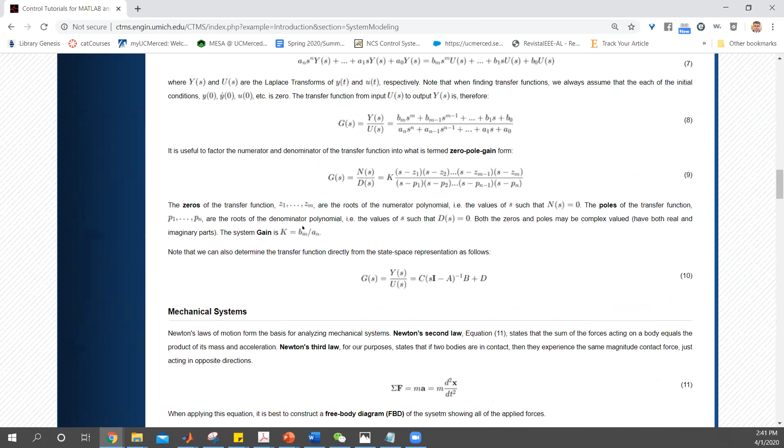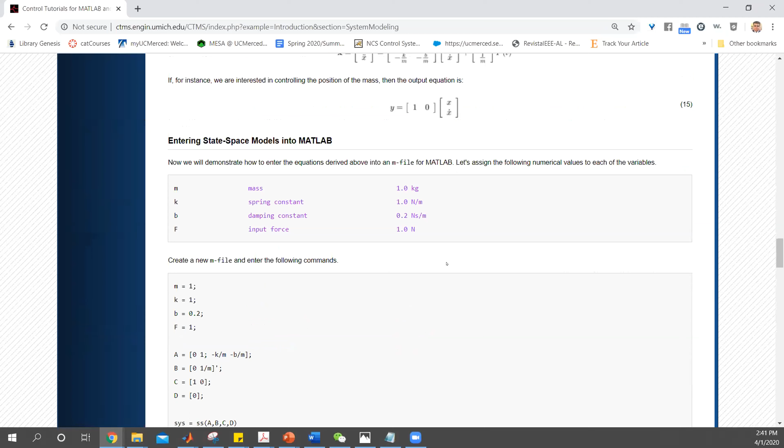This is the CTMS website, Control Tutorials for MATLAB and Simulink. We have introduction concepts like dynamic systems, dynamic response, and modeling. For example, here is the modeling of a system, and code required to implement systems in MATLAB, such as implementing the transfer function, making modifications, an RLC circuit, and many other important concepts.

We have different tabs: modeling, analysis, control. For control, we have different techniques: PID control, root locus controller design, frequency domain design, state space, and digital implementation. We also have another tab for modeling and control using Simulink instead of MATLAB code. Both are important and useful for performing the MAD methodology and designing any control system.

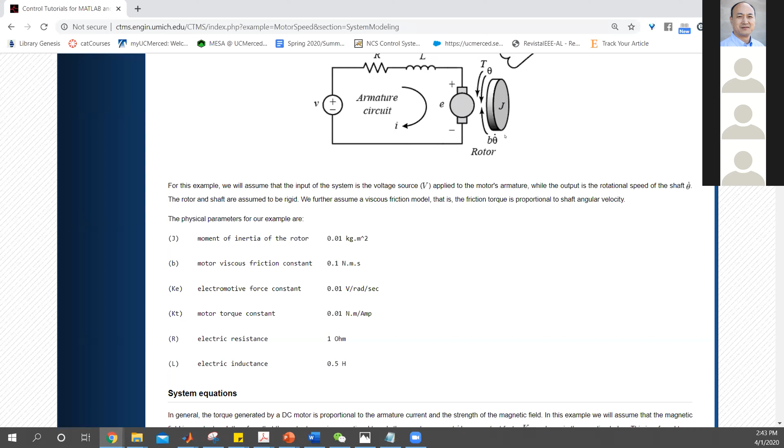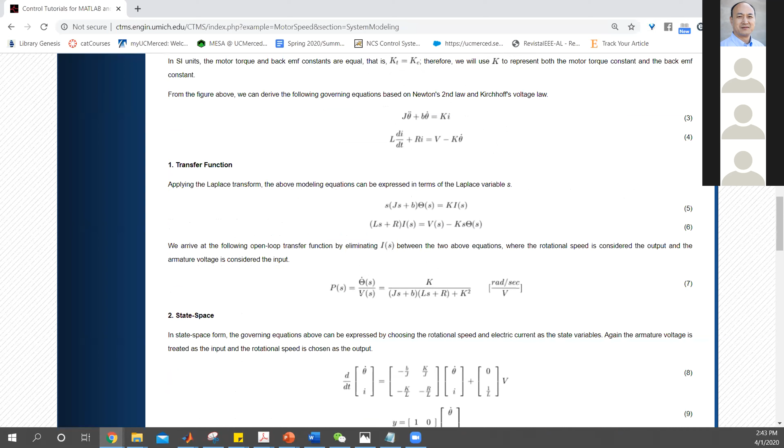The constitutive equations are used to derive the differential ODE that explains the dynamics of the system, and how to derive the transfer function for this system, in terms of speed and input voltage. It also shows how to derive the state space model, and how to build the models using MATLAB Simulink.

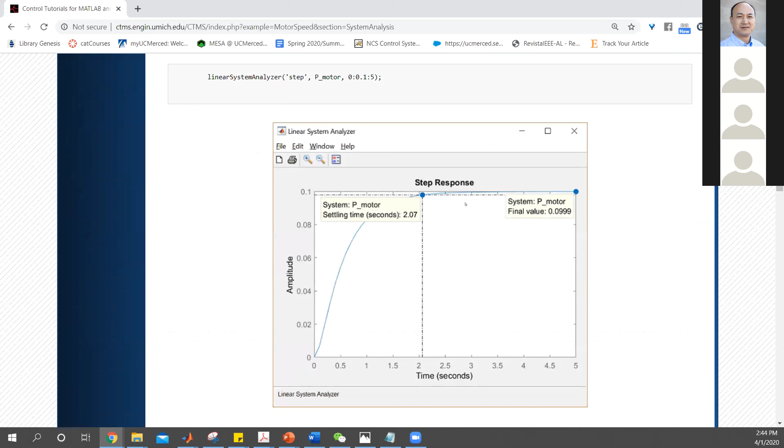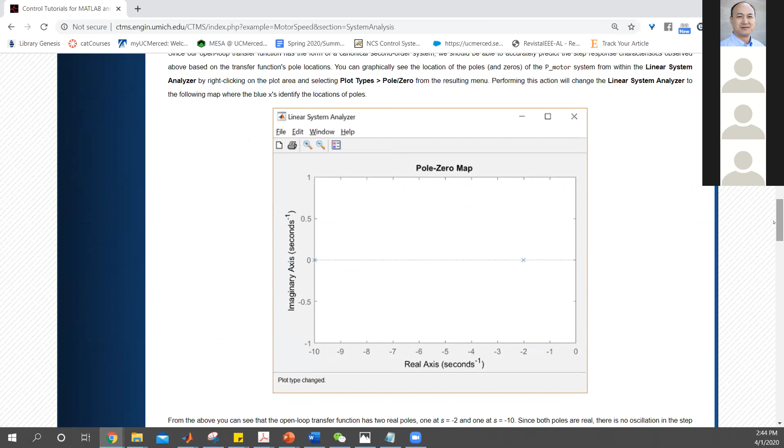Also, you can go through analysis. In analysis, you can examine the open loop response, for example a step response using MATLAB. You can also do root locus or a pole-zero map for this transfer function, and compare different responses.

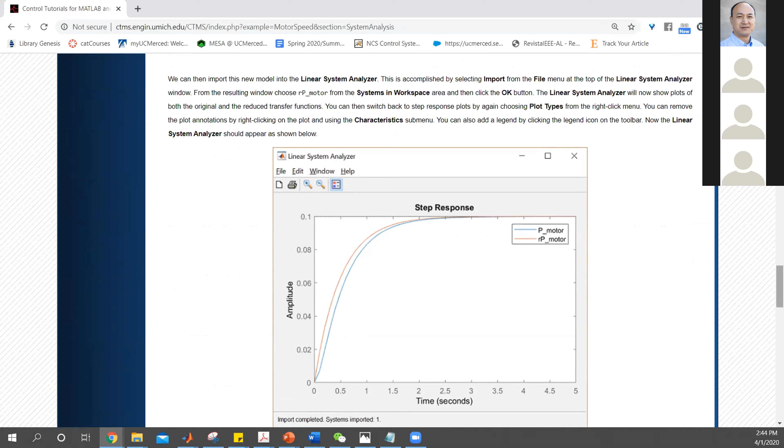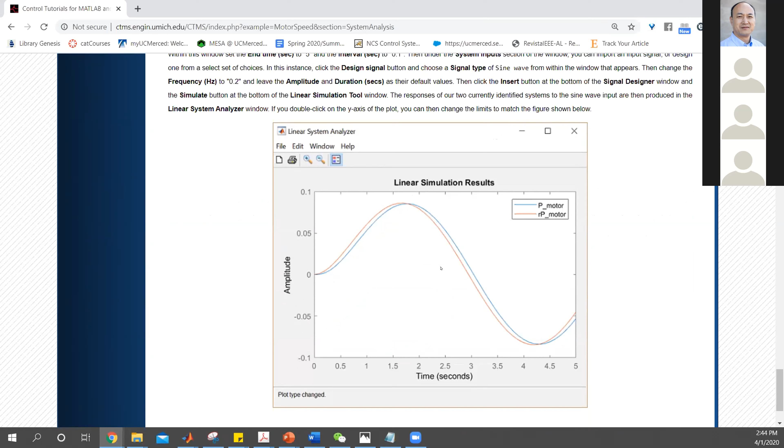We can see different responses if we change some parameters in the system. We can also test different inputs, not only step response, but sine waves or impulse response, depending on what the problem asks you to do.

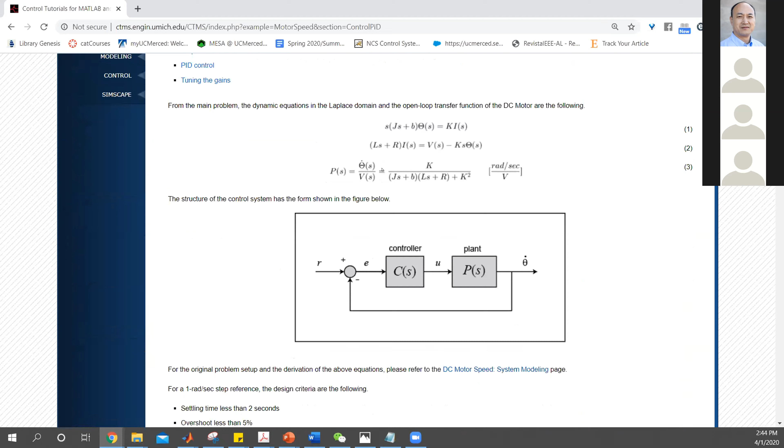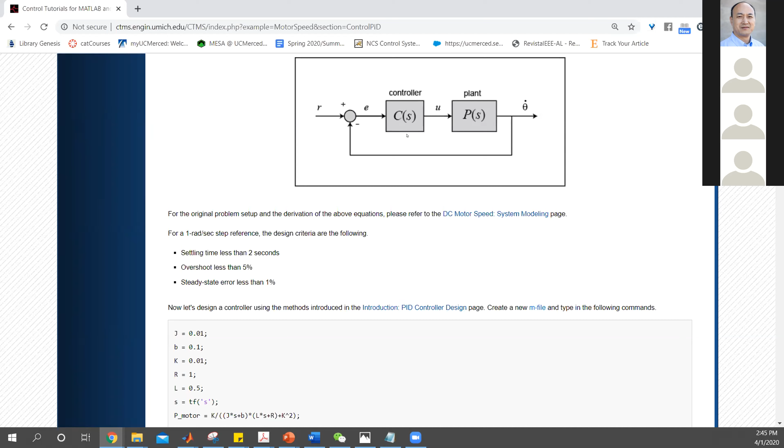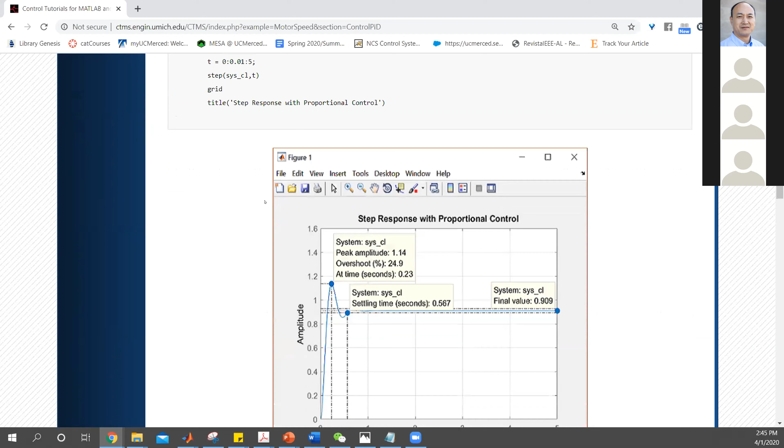Also here we have the control part, specifically the PID tab. This tab is based on the previous modeling made in the modeling and analysis tabs, showing how to make the closed loop to regulate the speed of the motor. We have the plant found before, the controller, the transfer function of the PID controller, how to implement the transfer function of the model, and how to derive the simple proportional controller, calculating its step response and performing analysis.

This shows how to design a compensator, specifically the proportional gain in this case, using all the tools that MATLAB has.

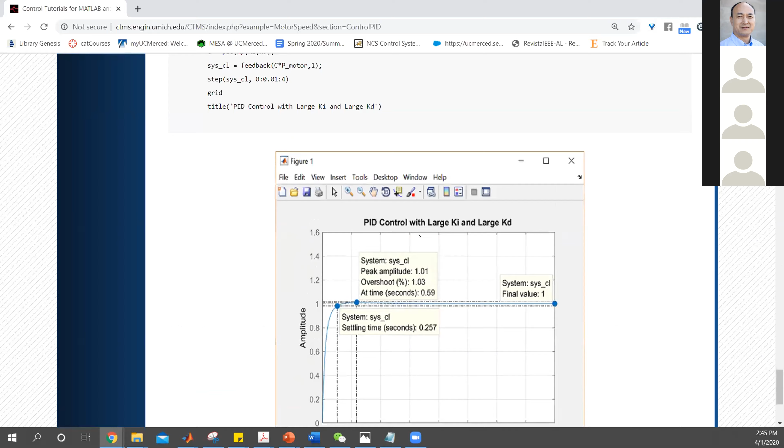Here we have the PID control tutorial, showing how to tune the gains and how the changes affect the performance of the system. You will go through all this during your lab assignments in order to understand all the steps of MAC: modeling, analysis, and control.

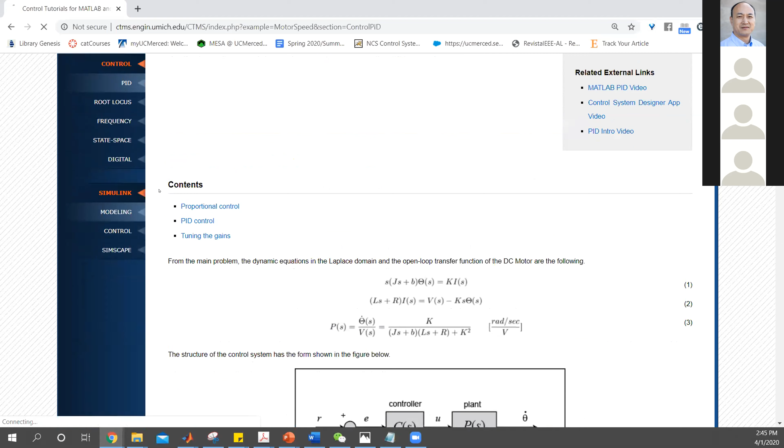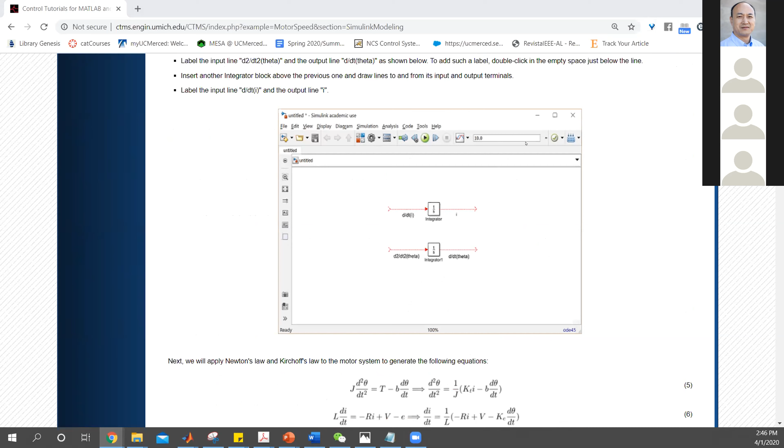Finally, you can go through all the other tabs as part of the required assignments for each lab. For Simulink, we are going to do the modeling again, but this time building it totally in Simulink, showing step by step how to build the electrical motor model.

Dr. Chen, we have a question. Do we have a quiz for today? We don't.

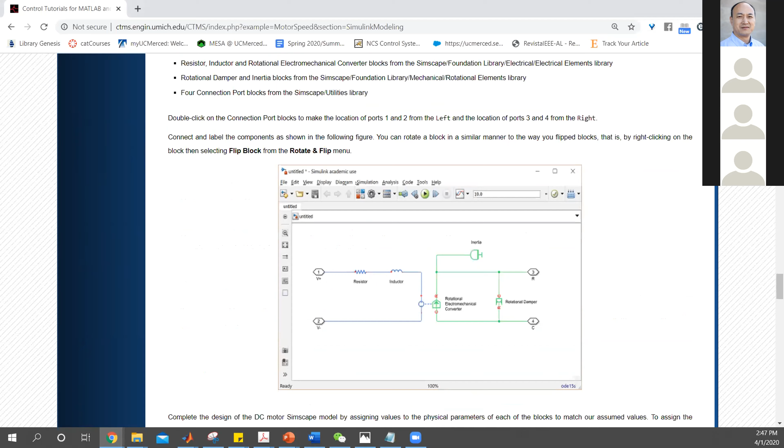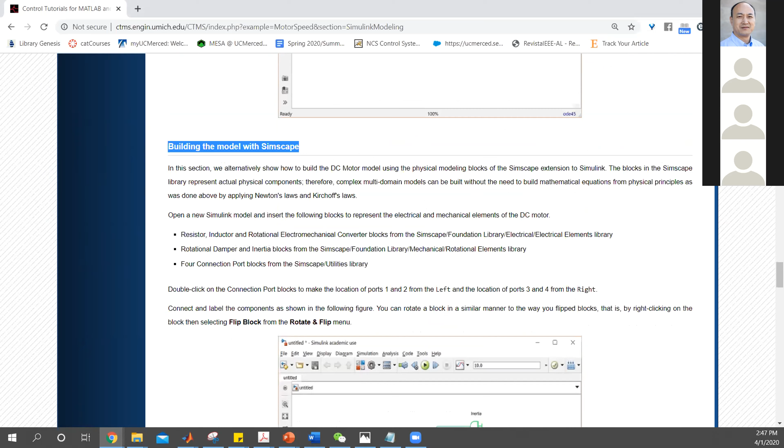Also, you can build using Simscape, a multi-domain physics tool within Simulink, but we are not going through Simscape in the lab assignments. We are only going into Simulink to build the model using Simulink elements, not Simscape. So if you see this Simscape tab, you are not going through there in the lab assignments.

All right, you'll find basically the same setup for any of the examples you have here. In this case, for the CTMS website, let's go back to the slides.

We will have three labs in this case: Lab 6, Lab 7, and Lab 8. Lab 6 is an introductory lab, a comprehensive learning of MATLAB Simulink, using the DC motor speed tutorial that I showed before on the website.

Basically, the due date for all the lab assignments will be Saturdays. Lab 6 is due April 11, Saturday. Lab 7 is April 18, Saturday. And the aircraft pitch control, the final lab, will be April 25, also Saturday. The idea is that you have plenty of time to work on each assignment. Right now, all the labs are available in catCourses, so you can work on the labs at your own pace.

Okay, so for Lab 7, we're going to switch the system to the DC motor position servo tutorial. In this case, Lab 7 goes a little bit further than the previous one. Lab 6 is more comprehensive, teaching how to use MATLAB and Simulink to build these models in the best way possible and make the models properly represent the dynamics of the system.

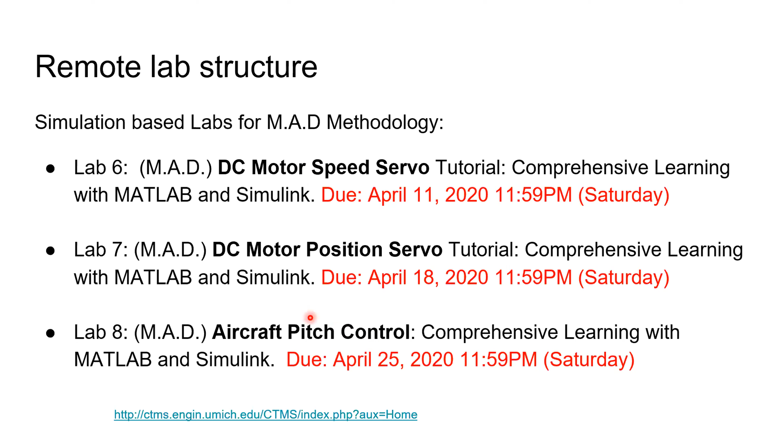Okay, we have here some lab overview for the system. These are the student learning outcomes we expect you to reach after finishing these labs: basically, understand the modeling and analysis steps of the MAD methodology applied in this case to the DC motor system.

It means deriving the equation of motion, transfer function, or state space model for the system. Learn how to obtain step response, pole-zero map, root locus, and bode plots for the system, which is really important for analyzing the dynamic behavior of the system.

Analyze the closed loop behavior using the different controllers you could find in the tutorial: P, PI, PID, and lag compensator. You will go through this.

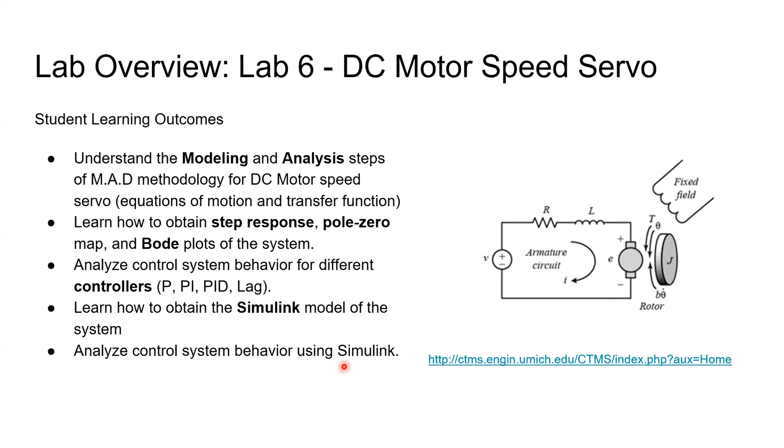Learn how to obtain and create your Simulink models for these systems. If you learn how to build this system, you can later build whatever system you want. Finally, analyze control system behavior, in this case using Simulink, not only the tools we have in MATLAB, but also the tools we have in Simulink.

All right, so for Lab 6 it's modeling and analysis; Lab 7 we are going to design. In this case, understand the design step of MAD. We are going to change the system a little bit—it's not speed control, we are going to position control, which is an extension of the previous system we used.

DC speed control overview: equation of motion, model reduction in this case for large poles. You will see how, if we have a very big transfer function, we can reduce it to maybe a first or second order system that has an equivalent representation of the system behavior.

Another important thing: understand the effects of P, PI, and PID control gains on your closed loop behavior. If you change the proportional gain, the integral gain, or the derivative gain, you will see different effects on your closed loop response. This is really important when you want to design a controller.

Another important thing is introducing the pole placement methodology for picking the control gains. In your Mechatronics lectures, you go through other methodologies; in this case, we are going to use pole placement, which is a model-based methodology. It means you have a model for your system—first or second order—and based on that model and some desired specifications, you can reach the proper gains for your controller to achieve that desired state.

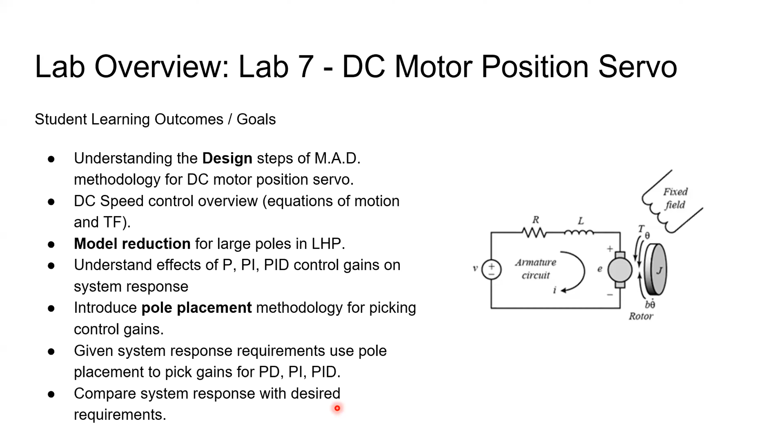For lab 8, aircraft pitch control, the student learning outcomes are to apply the MAD methodology for a more complex mechatronic system, in this case an airplane pitch, and to be familiar with state space and transfer function representations. Transfer function is one of the representations, state space is really useful also, so being used to employ both representations is important for you as future controller designers.

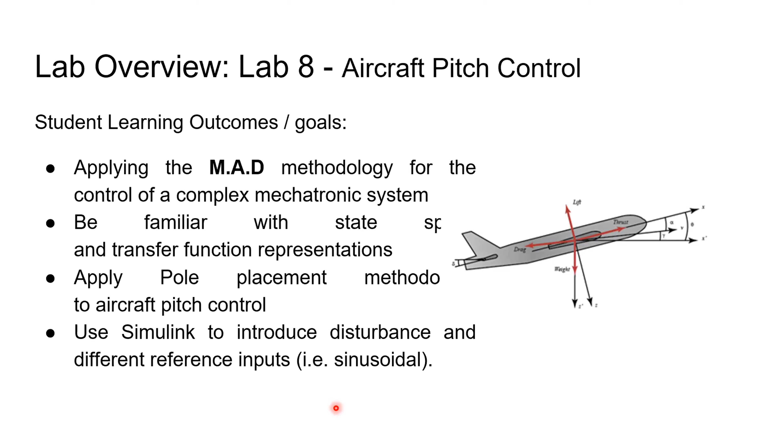Use Simulink to introduce disturbance and different reference input. What happens if your system is not perfect? If something goes wrong, how do I introduce this undesired behavior and how do I see how my system responds? This is the main idea of this lab: use the state space and introduce the disturbances that affect the system behavior.

Okay, I think now Derek is going to explain the lab report formatting.

And sure, yeah, so I can take over this part. I think you covered most of my other points on the other slides, but that's okay, Jairo.

So for the lab report, we thought we would add some structure. For the most part, we would like to see at least an introduction explaining the reason why we're looking at whatever lab we're looking at, then the main body with different parts such as the modeling part, the control part, or Simulink, and then you want a conclusion. One thing we didn't put on the slides: before the conclusion, or as part of it, you should put a summary of things learned, things that you guys took away from the lab.

And so we'll have a lab example report we can show you in a second. I did this in 2 columns. Can you go back to the slides really quick, Jairo? Yes, so the 2-column format is not mandatory, but I figured because the final project is going to be in IEEE format, it's more of a stepping stone for you guys.

Using this 2-column format will get you used to structuring your paper, and then the transition to IEEE should be easier.

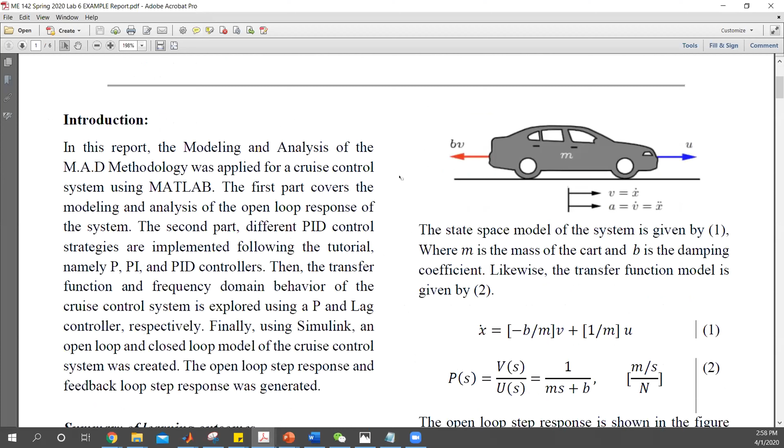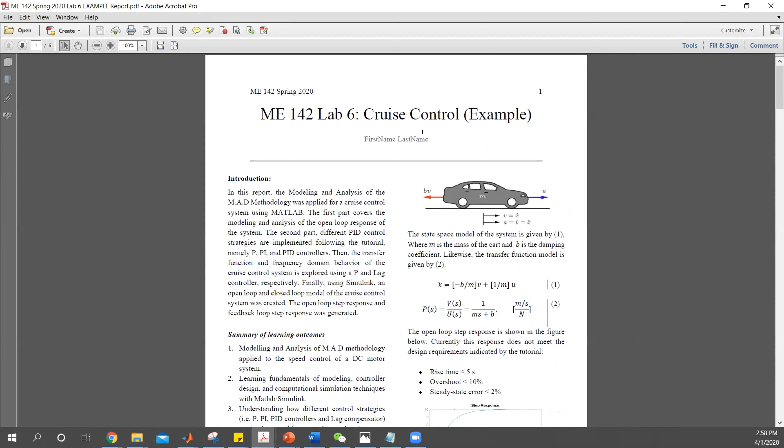This is an example of the tutorial on cruise control, and so we have an introduction part. Of course you're going to have your first and last name on top. We put the summary of learning outcomes in the beginning, and then we added information like diagrams of the car to show the system model, so calculate the transfer function.

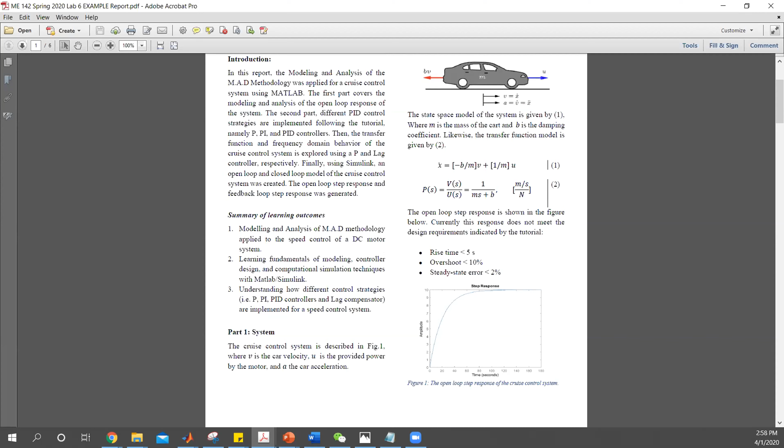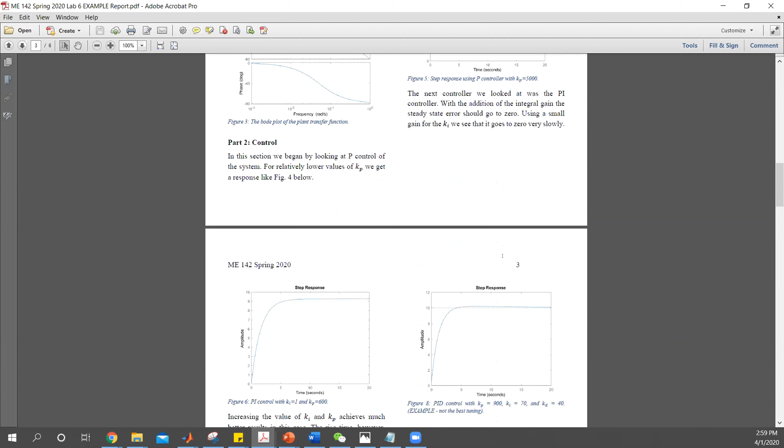And then we went down through all of the things we've asked you guys to do, at least for lab 6 in this example. We've plotted everything, added figures, and it looks like a lot, but for the most part it's just using MATLAB and Simulink, mainly to get you familiar with using these control tools that are available.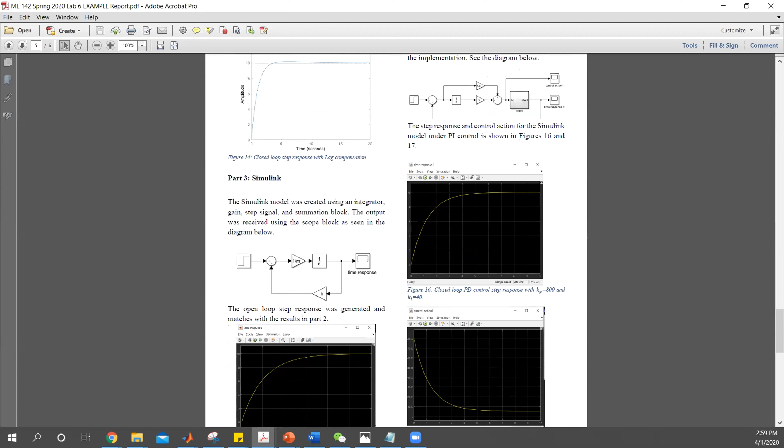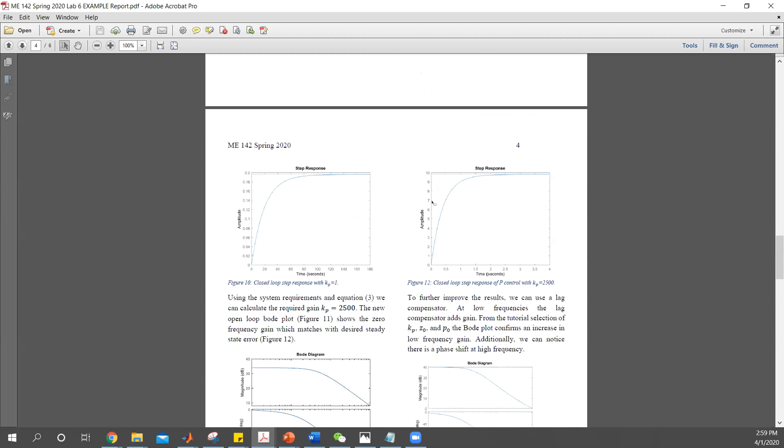Template for IEEE. Yes, there is a template. I have attached a link to the final project write-up that points you towards the IEEE website for conference proceedings. I felt like that one worked a little bit better, or at least the formatting is not as tough as the article versions. So that's on the final project write-up. Yeah, it has both doc and LaTeX for those that like to do LaTeX.

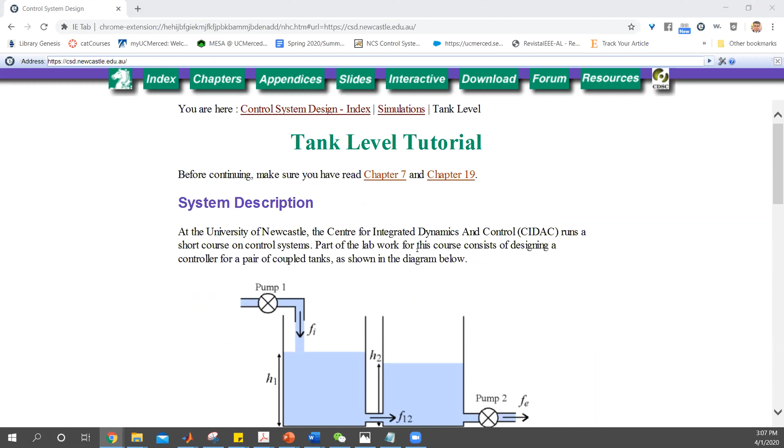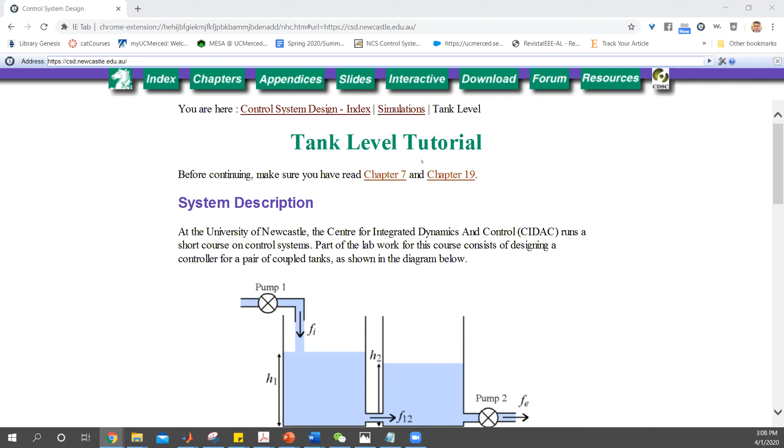It's important to say that we made a tutorial you could follow to properly install this extension and enable some exceptions in Java so you can run these applets without much problem. We made a detailed step-by-step guide, directly in the final project document. You can follow this guide, and we hope you can make these Java applets work. I'm going back again here.

We go here. Okay, I open the website. In this case, because I'm running this website with Internet Explorer, this is a really old technology called ActiveX control. We are going to set it to run. Remember that before, it said you cannot run, you don't have a Java enabled browser. Now here you can see this chart is enabled.

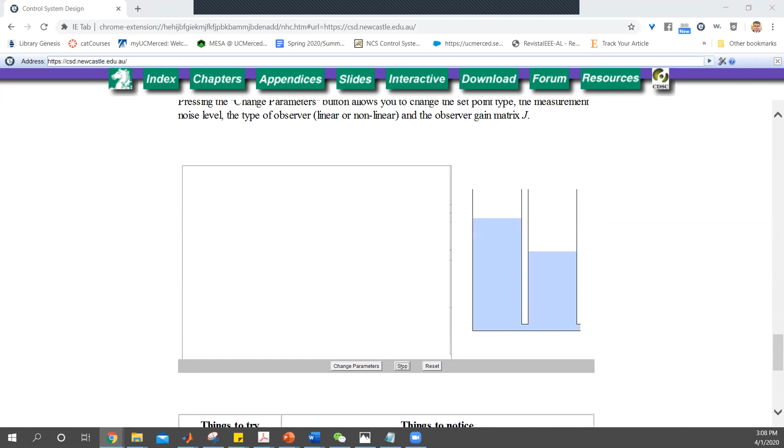We can set here start, and you will see how the simulation is running. Of course, you can modify the simulation parameters using, when you push change parameters.

You can change, for example, the type of the set point, if you want a sine wave, if you want a linear or nonlinear observer, how much noise you want on your measurement, which gains you want on your observer gain matrix.

For example, I'm going to reduce this one and see what happens. Okay, now the simulation changed. Here we can see the parameters.

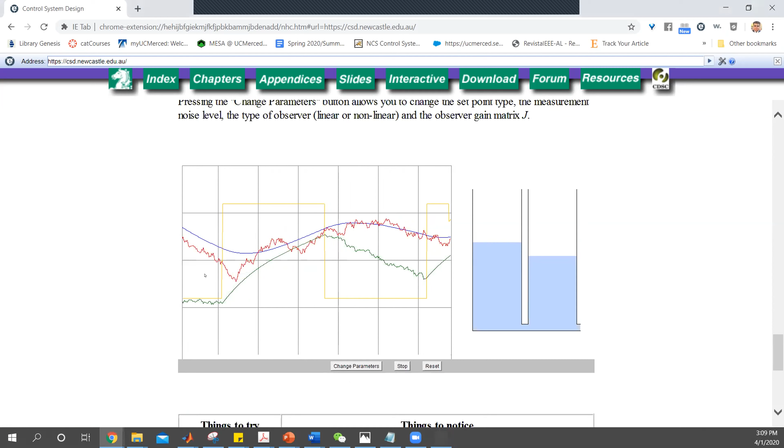I can change also this square to sinusoidal. The green curve here is your actual tank level of tank 2 on the right, and the yellow curve is your set point, just for reference. The gain here is pretty low, so the green line doesn't converge to your set point in yellow.

And so you guys can play around with this, I think. Can you click the change parameters? Mm-hmm. So those observer gain settings, you can play with them.

However, in your report, you must get these two numbers with very logical step-by-step justification. It's theory supported, it's not try and error blindly.

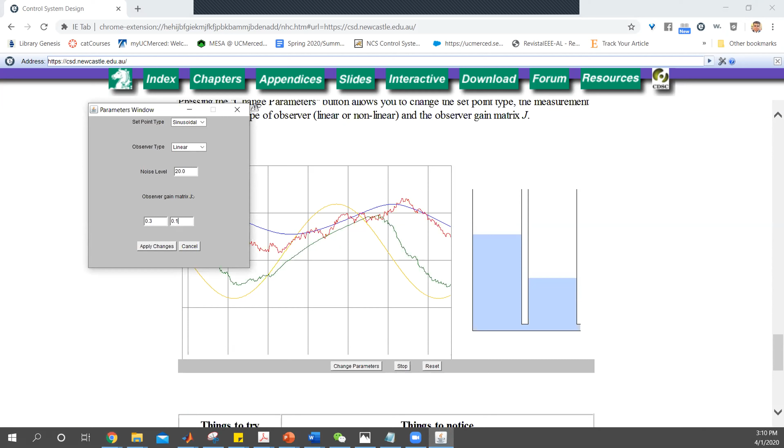Right. All right, go ahead. In this case, we changed again. It tries to follow, the green line tries to follow a little bit more the reference, the sinusoidal reference.

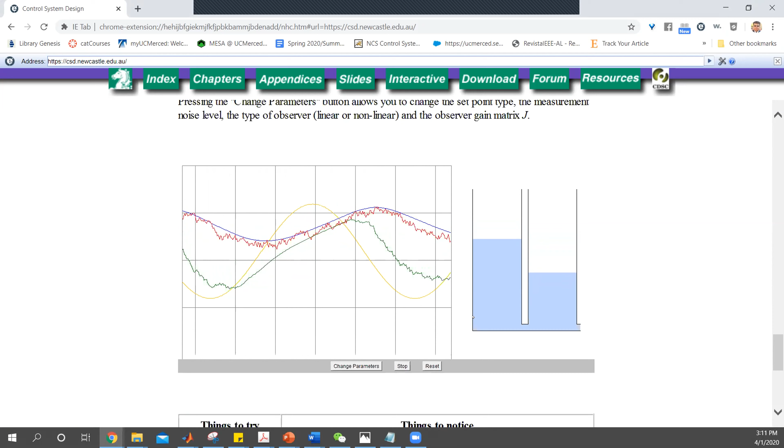In the bottom, you could find, for example, things to try: change the observer type from linear to nonlinear, move the observer poles towards negative infinity. You can try many different things here to play with this tank level control.

I know many of you use Mac. Also, we have a tutorial to run these Java applets with Mac. Both links are in the final project document, so you can run it in both cases if you want.

So this is called IE tab. It's embedded within a specific browser, from Microsoft, or from Google actually, Chrome, right? So yeah, it's a plugin for the Chrome browser. Correct. Yeah, yeah, it's interesting. I didn't know this, that there's such an option.

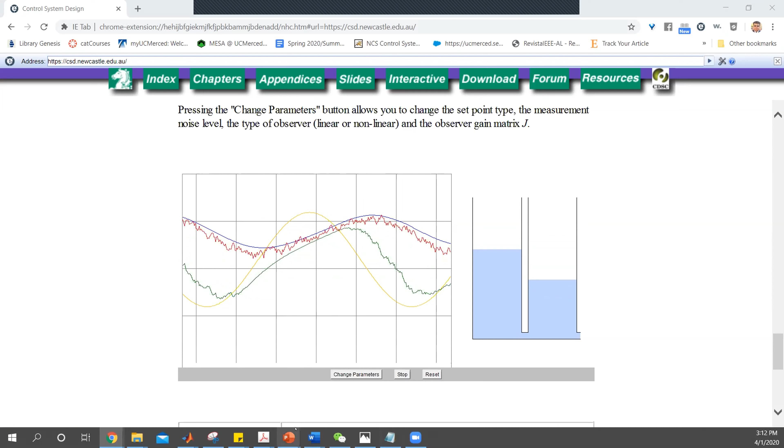Okay, so any other questions from the class? Let me check the chat box. I want to thank both of you for exploring all these options, so we have the lab looking like a real lab. At least you can see something moving. Okay.

So here's the final project deliverables, reiterating what we talked about earlier. It's going to be a 5-minute self-recorded final presentation, where you'll mainly discuss the significant parts of the project, issues you've had with your design, your simulation, these sort of things. More details are in the prompt. The paper itself will be roughly 6 to 8 pages, which isn't very long once you include images in IEEE format.

We put the due date on the 11th, but it's not Saturday, I believe it's the Wednesday, which is the day of your final. So it's due by end of day on the day of the final. I think the final is the 13th. That was the goal, to set it as end of day on the day of the final, leaving some time after, since May 11 is Monday. Yep, so we can change that and re-upload for you guys.

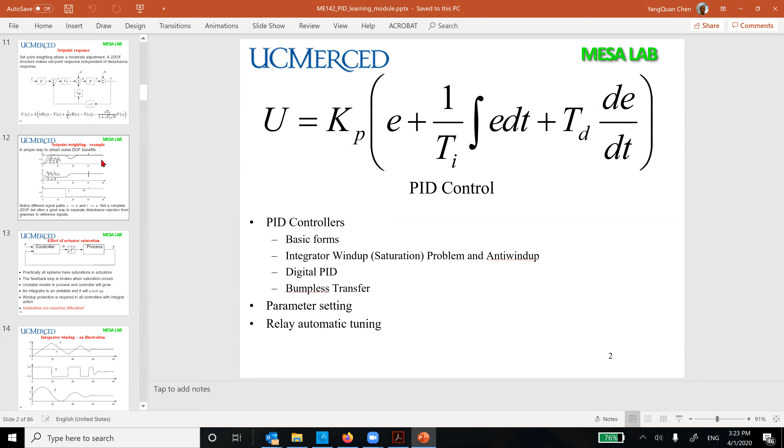ISA form. Let us try to recall what we learned last time. The key concept is called integrator windup, okay?

Integrator windup. So if I put a PID control, the integration - if you have a saturation in the control signal, your output will, your integration term will be so high such that the U proportional to this will get limited. When the U is limited, your output is like open loop control, all the way integrating up, then come back, so it's very bad. After several oscillations, it will become steady state error is 0. So that is no good, okay? That is no good. So this is called effect of actuator saturation, okay?

But fortunately, there is a scheme that we should consider - it's called anti-windup scheme. So this is the signal you applied to the actuator, so you have saturation here. So you pull out these two signals and the difference, multiply a gain, subtract from here. So it's not so easy to get saturated from this integrator. Then after we use this anti-windup scheme, the original without is this, with is like this - so you can see there's no such oscillation there.

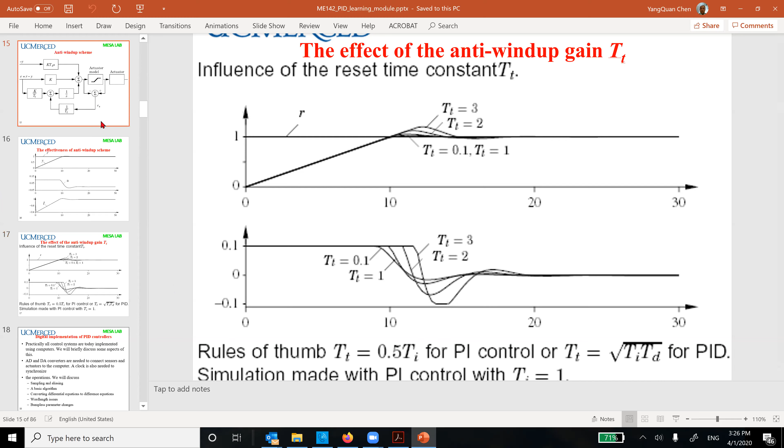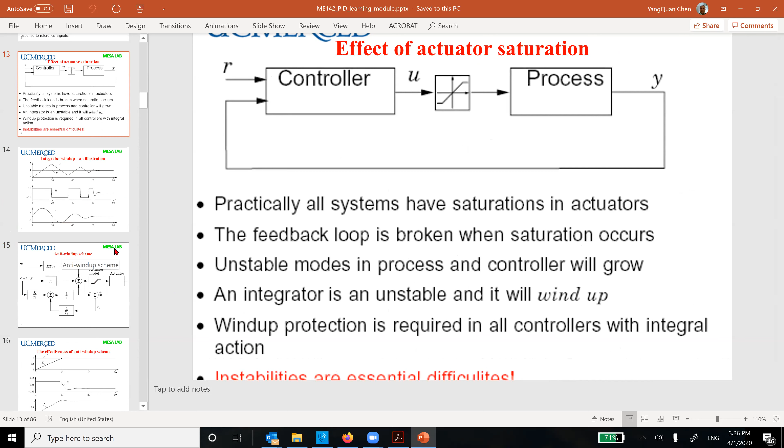So I hope this is a very important part that you will never forget in your lifelong career - that whenever you have an integrator in the loop, you always have saturation. You always have a saturation, okay? It's not avoidable, you always have it. So therefore you always need anti-windup saturation compensation here, so that you have something like this instead of ending up with this.

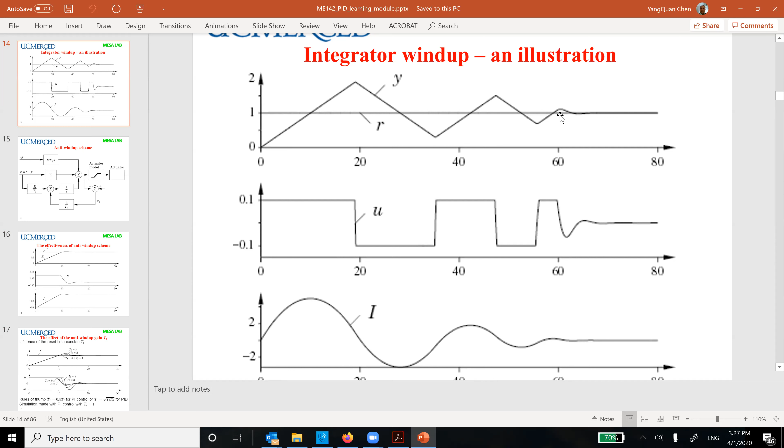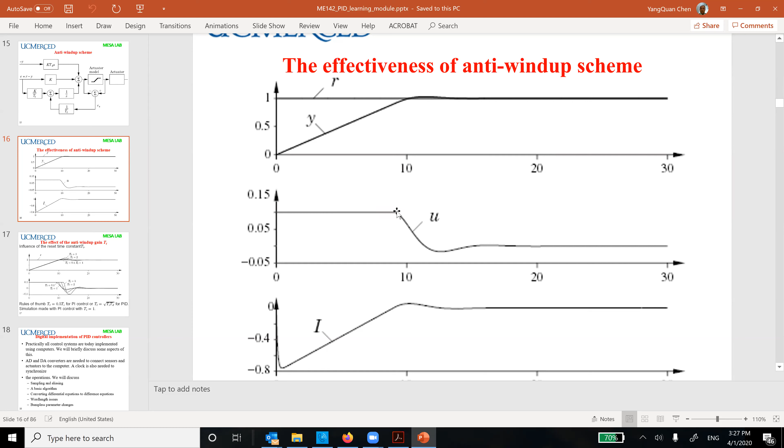Did I tell you a story about my PhD student, a former PhD student, who wasted 3 months in summer? Because of this behavior, his robot moving from A to B, in between the robot would spin randomly - sometimes spin several circles, sometimes spin many circles before it moved again. That's exactly due to the integrator wind-up. The reason is because in the beginning stage, your integration, your error is big - your error is big in here. So it accumulates all the error, and then it easily hits the limit of the control authority, okay? So that's anti-wind-up.

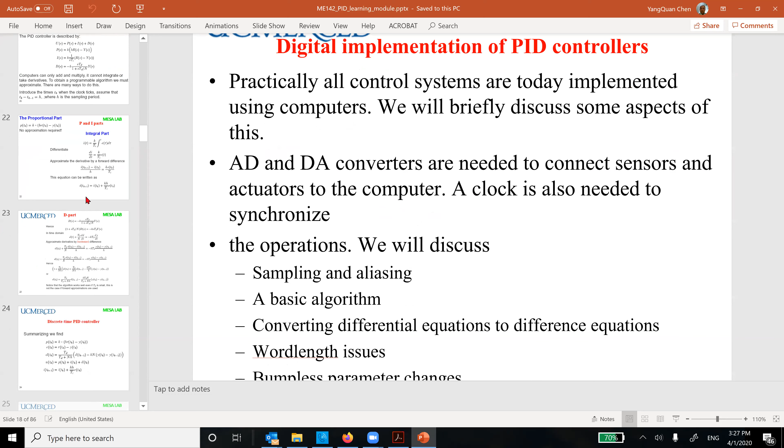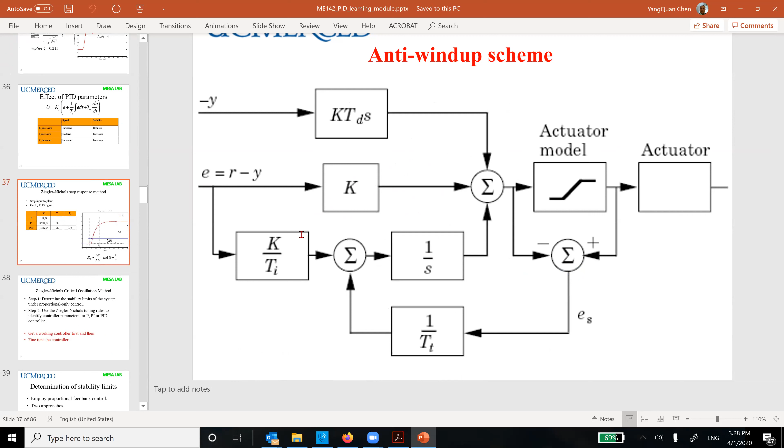All right, so today we are going to learn something very important. We mentioned how I can set up my controllers. I said you use a Ziegler-Nichols tuning rule, you do a step response, you measure delta Y and delta U.

So you have delta Y divided by delta U. This is KP, like a DC gain, okay? Then this is one parameter, and you have another parameter called theta, which is L divided by T. L here is the delay, okay, the delay. And then T is from this step.

This is the step, okay. So this blue line is a step. Then you have a delay in here. This is tau, this is L. Then you have an inflection point in here, and that gives you the capital T.

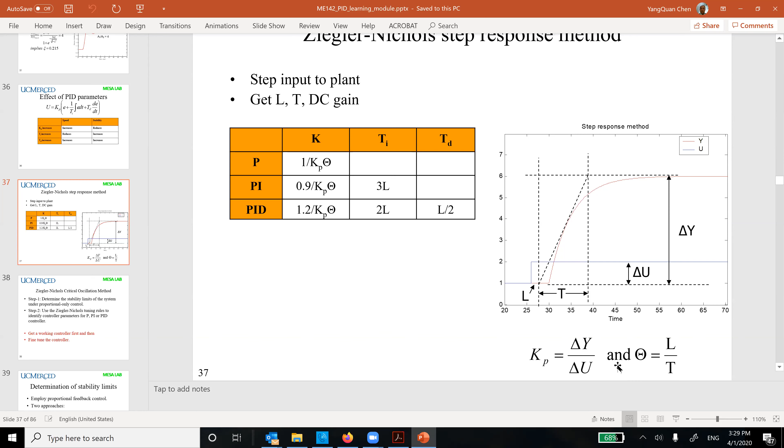There is MATLAB code you can use to automatically approximate and get this KP and theta. With KP and theta, you use this table, called the tuning table. It is invented by Ziegler-Nichols, but this is called the step response method.

Originally, Ziegler-Nichols invented the tuning method, but it's not in this form, okay? So remember in the PID, you can see TI is 4 times of TD. Can you see that? This is 4 times. This is a magic number, okay? This is a magic number.

I have full understanding about this right now, okay? I challenged this, this is an assumption. I challenged it, and then I published a paper on this to change it. But anyway, that's a topic of research. What if they are not 4 times? So this one here is 0.9, a little bit slower. This is bigger, so you can see some trade-offs in this slide.

Let's see. But this is one of the two methods for the Ziegler-Nichols tuning rule. On the other hand, Ziegler-Nichols' original idea is called the critical oscillation method, okay, it's called the critical oscillation method.

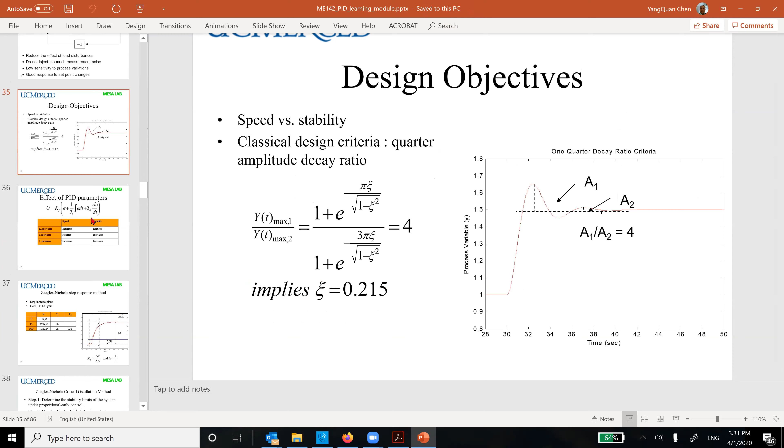So then you can use the step, you can use this one here, it's called step signal-based tuning. We explained last time, okay, this one is called the step response method. But in reality, originally, Ziegler and Nichols both invented the method. It's called the critical oscillation method.

What he did is, he said, let us give a P feedback, okay, a proportional-only feedback to the system. Then I tune this KP to a point. You can see the bigger you put, the system is going to be more and more unstable.

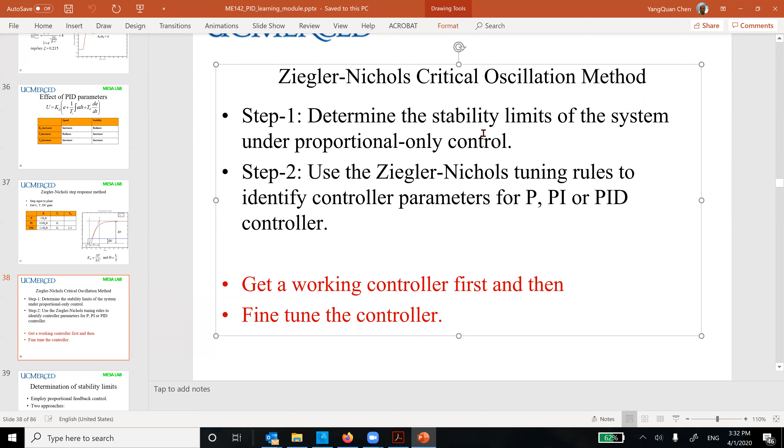So then, until you reach a point where you have a critically damping case, it's oscillating. It's not decreasing, it's not increasing, it's just a sinusoid. So that's called critical stability, at the stability limit, it's critically damping. So then once you have that, you know what is your KP, that number, and you measure the oscillation period. That period is called the ultimate period. So we should use this one.

So this KCU, I'll run the example for you, don't worry. So KCU is, you tune the KP bigger until you see an oscillatory response. Then you stop and see what is your KCU. It's called critically damping, so this is called the critical gain also.

So you put half of the critical gain if you use a P controller. If you use a PI controller, you put 0.45 times the critical gain. If PID, it's 0.6 times the critical gain. But how do you decide TI and TD? These are based on measurement of the PU, called the ultimate period.

The ultimate period is just in time, okay, so this is also consistent with the time. You divide by 1.2, so divide by 2, divide by 8. Again, TI is 4 times of TD. Did you see that? That's actually an assumption.

I'll show you whenever I get a chance to show you. So you may say, hey, if the system, you push the KP, you push the KCU and the system oscillates, that's...

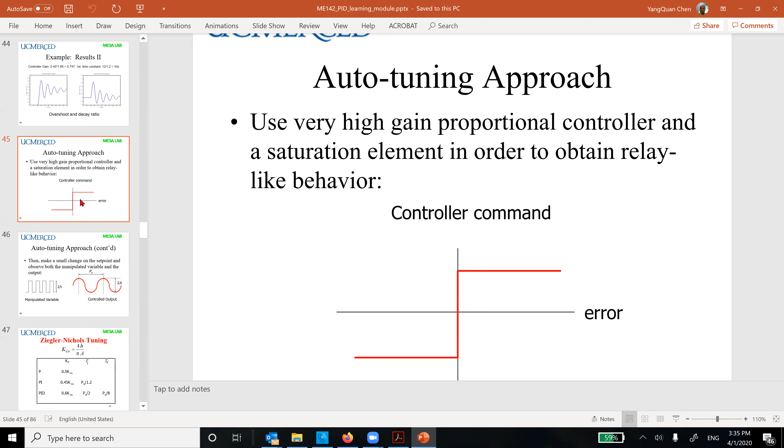It's called relay auto-tuning, relay feedback, okay? What that means is you put this unit into the closed loop, then the closed loop will start to oscillate.

The system will behave like this. Control is saturated, and output is something like that. So it's easier to measure the PU, same as PU, and this is 2H peak to peak.

This is 2A peak to peak, but this 2A and 2H, you should use this magic equation, 4H divided by pi A, to convert this into KCU.

Why is this so? There is some theory behind it, but for now just accept it's true, because with this type of relay test you are not going to damage your system.

Then the system will start to oscillate because of the relay, positive or negative. Then your control signal U becomes this square wave, and Y becomes a sinusoid.

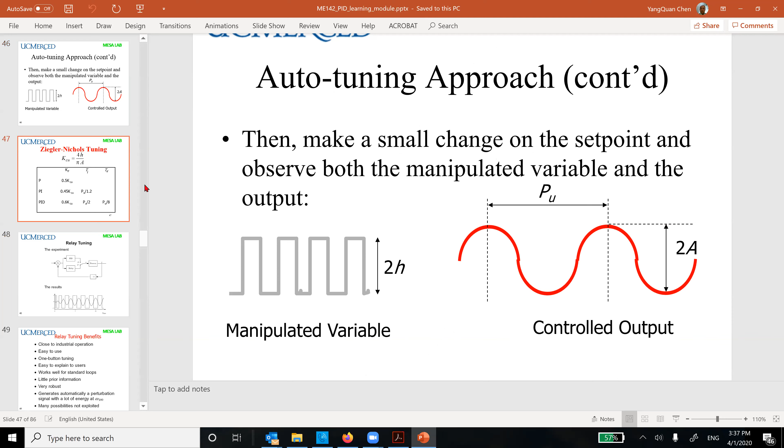So based on that, you can measure this type of ratio and use this formula and the tuning table. So this is called the relay-based tuning.

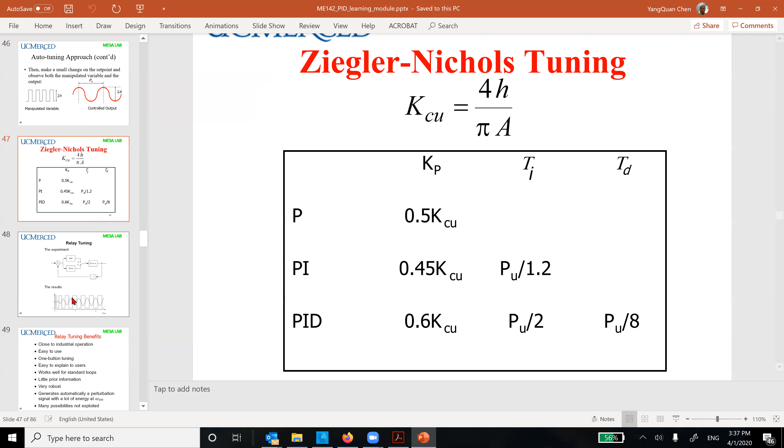Or ultimate frequency PU, ultimate time period PU, and ultimate critical gain KCU. So the benefit of using this relay instead of pushing the proportional gain to the limit is...

...this is widely used in industry already. It's easy to use — one button tuning — and easy to explain to the user, and it works well for standard loops, and you don't need prior information, it's very robust.

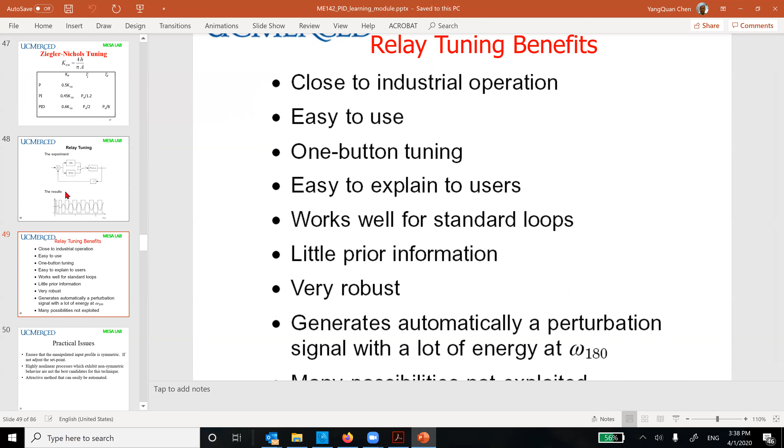You can get this system. So basically you push a button, it runs a relay test, you record data and extract the information, look up...

...a table, put all the coefficients into the PID, then you turn it back to automatic mode. So then you can just get this PID tuned.

But sometimes you may want to retune it — doesn't matter, it can come back again. So the oscillation of Y is not going to be at the instability boundary; it is under the relay feedback.

So the relay output is either positive or negative, so U is my control — it's like a square wave.

Square wave. So this can be automated. This is called relay-based automatic PID tuning.

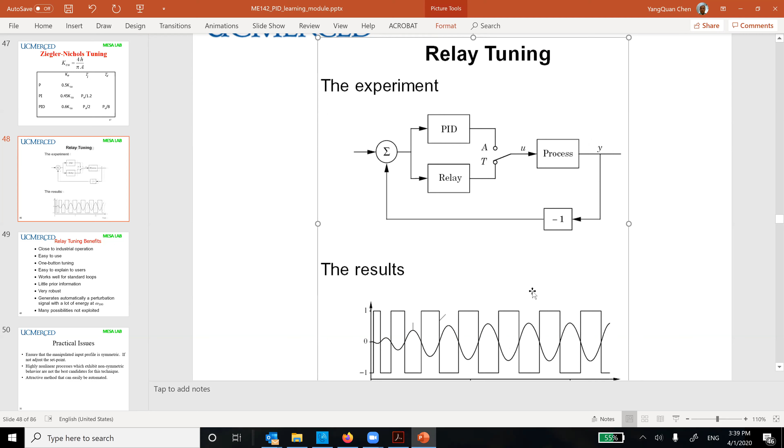I hope you have heard about this. Let's run through an example, then it will be nice.

Can you see the example? I think you can, let me see. Yes, you are seeing this. Let me see. I'm still recording, I guess.

You will see what's going to happen. You increase it, it will start to oscillate. Okay, so then I measure what is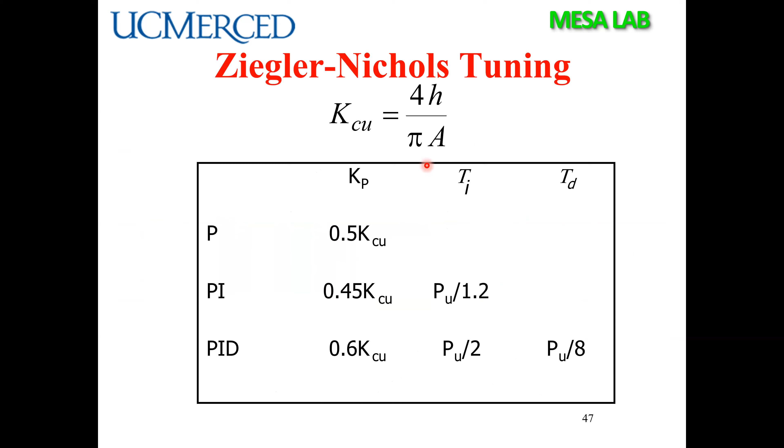So we introduced the result here. This is the KCU value we get. We're going to use PID control, applying the PID tuning rule we just learned. With that, we'll be able to do closed loop control.

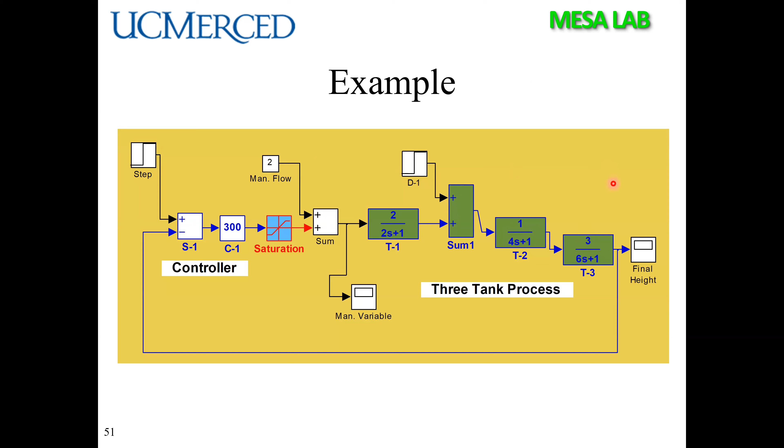So the step response is very nice. And the step disturbance is something here, we call these disturbances. Assume we added water to this tank, then the level will change. This is called disturbance rejection, so you always come back after you've injected some of the flow.

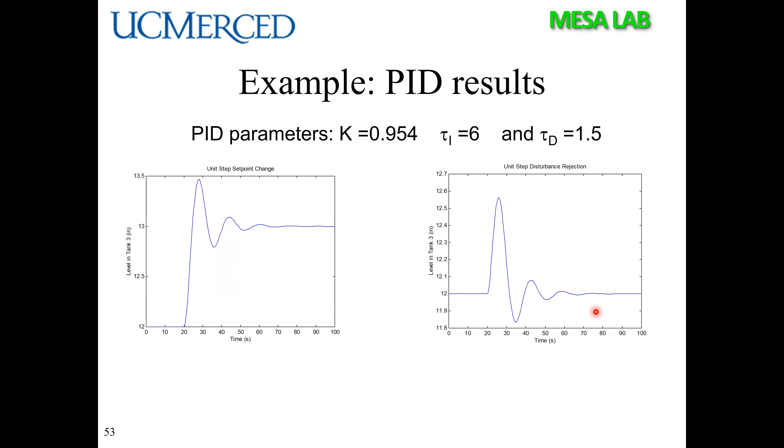So in PID tuning, in the rest of a few minutes, I'm going to show you there are choices like using P, using PI, or using PID. All these questions need to be addressed, especially in industry settings, where you need to talk about reliability issues and field tuning issues. So when to use P control?

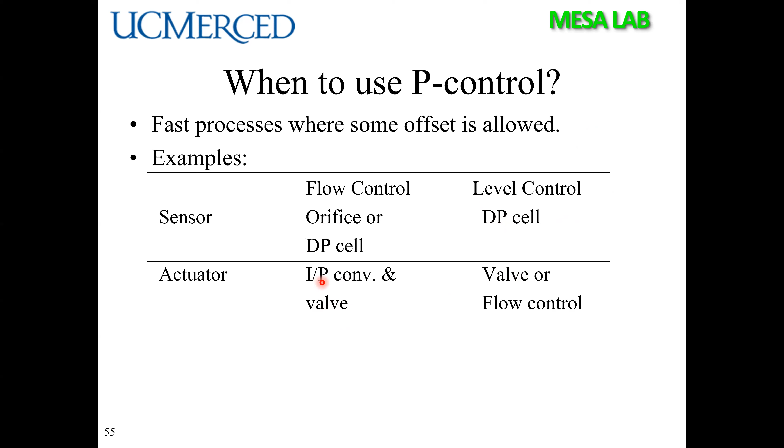Of course, P control for a type 0 system will have a steady state error, as you've learned. For fast processes, some offset is allowed, so it's okay to use a P controller, like flow control or level control. Sensors and actuators use orifice plates and flow control valves for flow, and for level control, a DP differential pressure cell with a current-to-pressure converter.

So when to use PI control, this is the most popular one. When the process is not sluggish, but offset-free operation is required. Offset-free means zero steady state error. For example, pressure control in distillation must be tightly controlled without bias.

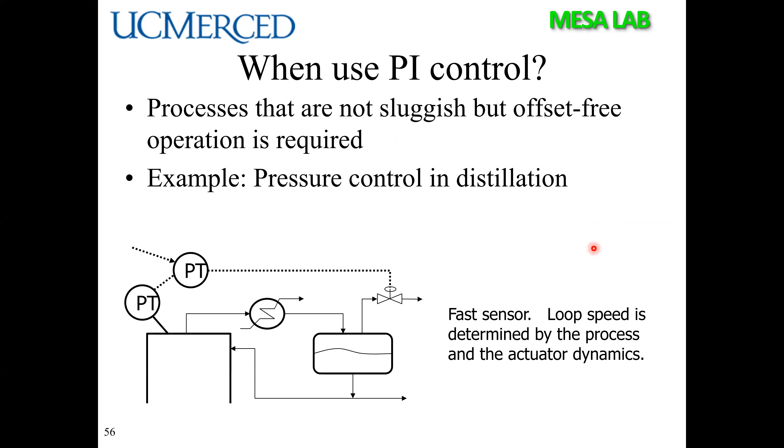So when do you use PID control? If you have a sluggish system and want it to respond faster, especially with larger delays, it's preferred to use PID. But when you use D, you have the problem of noise - differentiation will amplify noise. So PID is widely used in temperature control for furnaces, where you have a large time constant, meaning it's sluggish and slow, and you have transportation delays in chemical systems.

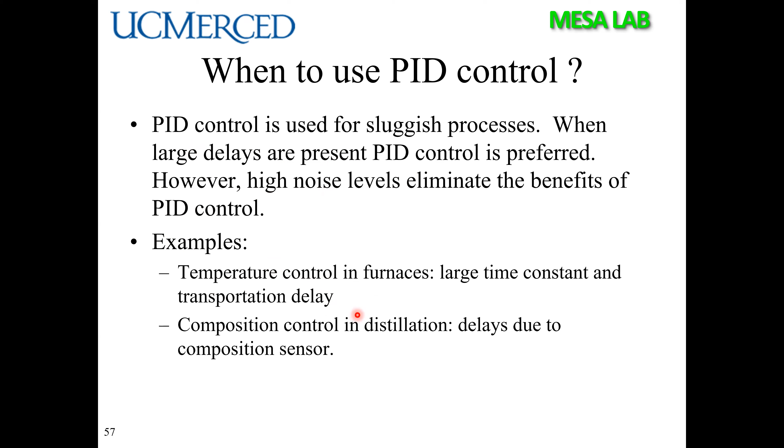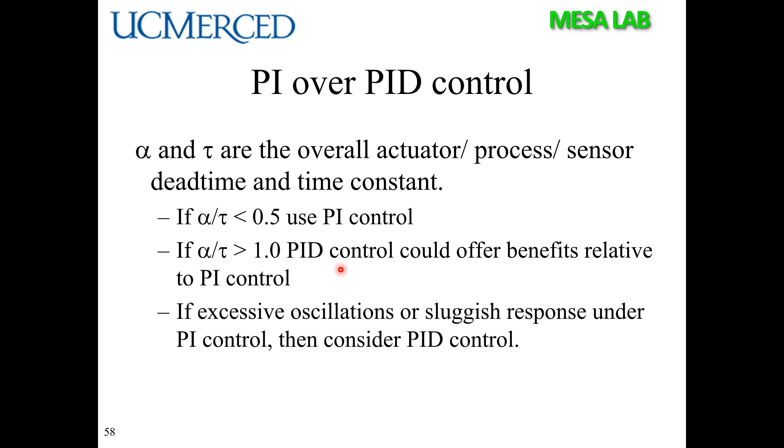PI or PID control - sometimes people use the dead time to time constant ratio. If that ratio is less than 0.5, use PI; if greater than 1, use PID... these are just rules of thumb.

There's a comparison in this deck of slides. Today we don't have any quiz, we just hope you find time to go through all the slides for the PID module. From next lecture, I'm going to do digital controls - it's quite important, and digital control is definitely part of the final exam.

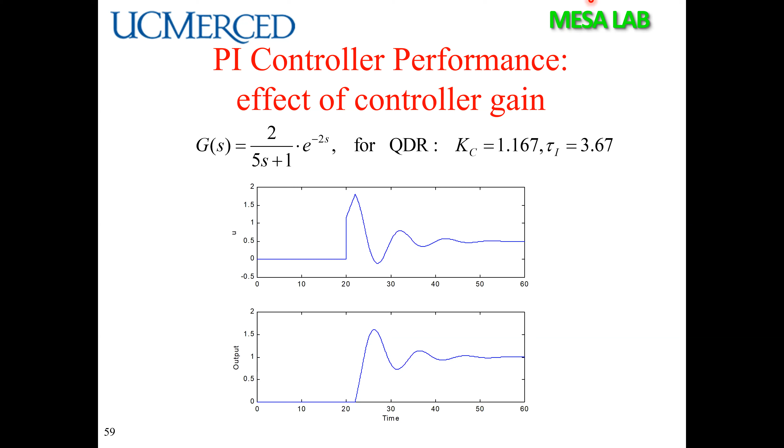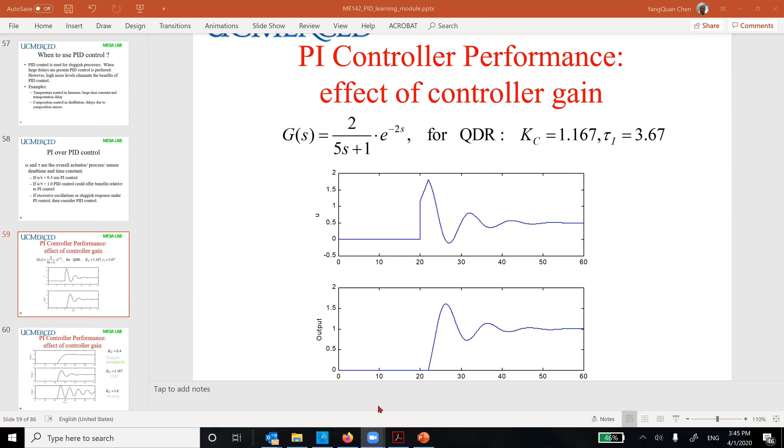Can we do it on Simulink? Yeah, you can. I don't care if you use Simulink or MATLAB. Sometimes MATLAB is easier, sometimes Simulink is easier. I like Simulink.